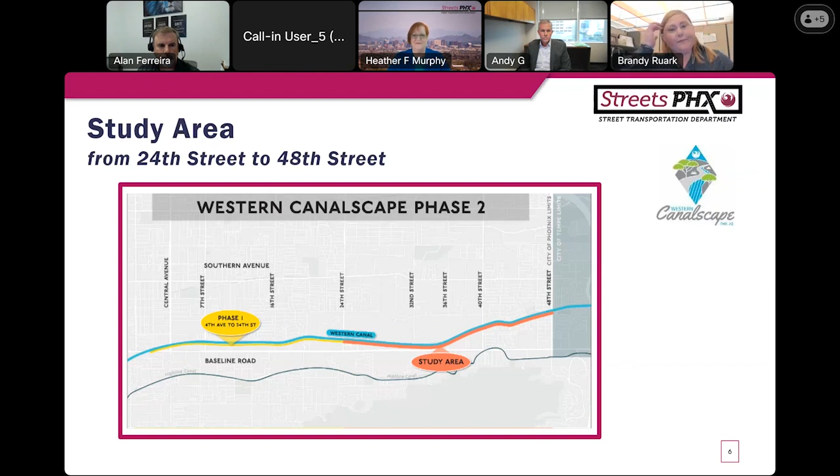The Western Canalscape Phase 2 study will provide an additional recreation route that builds toward the 2050 Climate Action Plan goal.

Also, the Phase 2 study will provide a safe route for people walking and biking and safe street crossings like shown in the example photo for Grand Canal Phase 1.

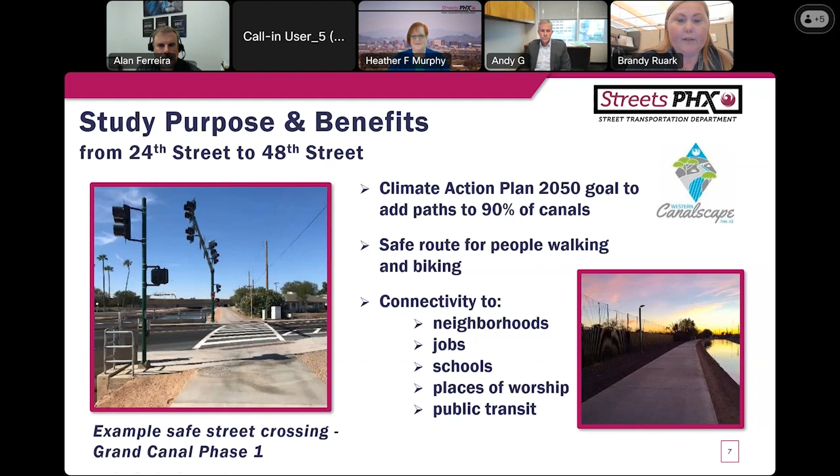Another great benefit of the study is it will provide connectivity to neighborhoods, jobs, schools, places of worship, and public transit.

This study for Phase 2 is in the conceptual phase in planning and pre-design to find out what's possible and what the community would support to make decisions for study options we are proposing tonight.

We are currently conducting pre-design, and the next step is to look for funding for design and construction.

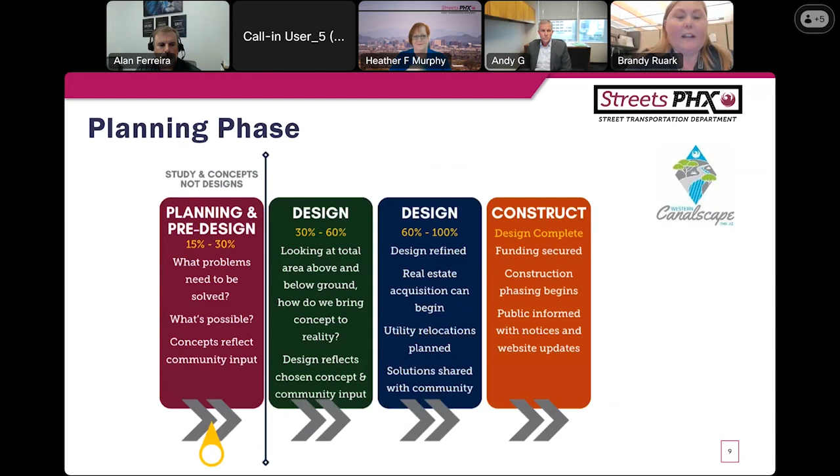This study is for Phase 2 of the Western Canalscape series. Western Canalscape Phase 1 is at the end of final design and goes into construction later this year, and is between 4th Avenue and 24th Street, while Phase 2 extends improvements to 48th Street.

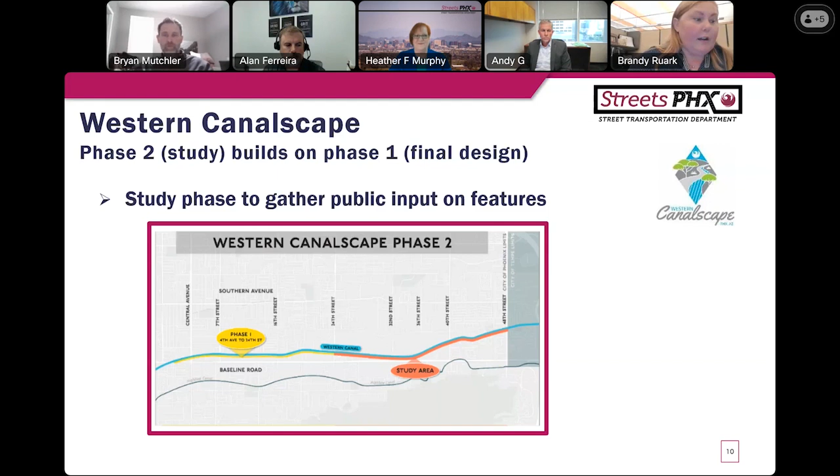Tonight, we are seeking your input on study options for Canalscape features.

The study is a joint partnership between Salt River Project and City of Phoenix. We are following guidance from SRP in building canal paths.

SRP uses a 20-foot minimum usable bank width as shown alongside the canal to maintain it. The area for recreation is the canal path shown that's within this 20-foot usable bank width, while lighting, landscaping, and amenities are located outside of the 20 feet so SRP can maintain access.

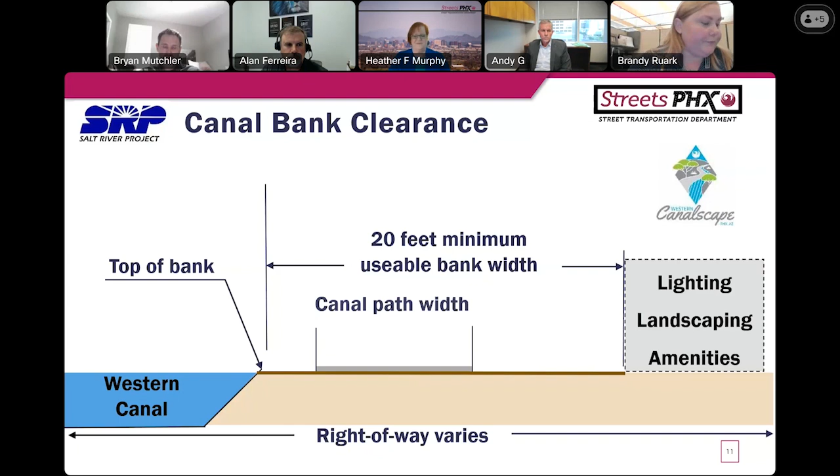The purpose of our engagement tonight is to introduce options to the community and present the options that will take the study to the next stage.

We met with the community in May 2024 to get the word out about the study and receive feedback from the community on what they would like to see in the study area.

At the same time, we conducted the first online community survey to get feedback from the community on their outlook for updates to the area. The responses from the survey helped to propose and present options tonight.

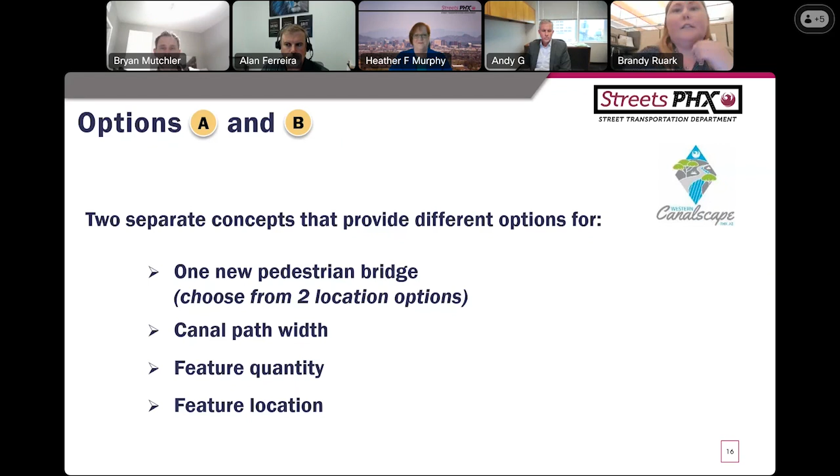A pedestrian bridge will provide connectivity throughout the study area for canal users. The study only recommends one pedestrian bridge at this time.

The community survey that is going live tonight will allow you to choose one bridge location from two options. Pedestrian bridge location option 1 is between 36th Street and 40th Street, while pedestrian bridge location option 2 is between 40th Street and the existing pedestrian bridge.

This existing pedestrian bridge is a few streets to the east of location 2, and we will be improving the decking on this existing bridge as part of this study.

Alternative options A and B provide the opportunity to choose your preferred canal path width, of up to 10 feet or up to 12 feet. Western Canalscape Phase 1 has up to a 10-foot wide canal path, but we can change the look of Phase 2 with up to a 12-foot path. This is an updated standard based on the active transportation plan and will provide more comfort and room to share space with all canal users. Keep in mind, the number of amenities will be impacted with up to a 12-foot wide path.

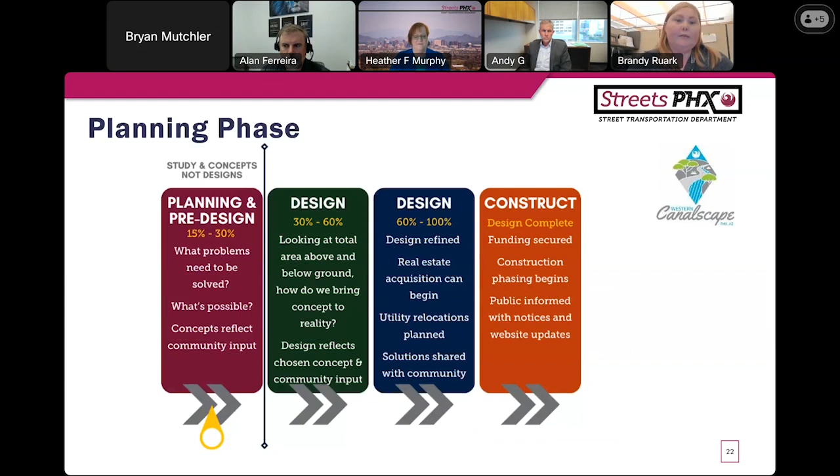Please visit our study website to take the online survey by May 18th. Also, we have a project hotline to gather comments and answer your questions about the study.

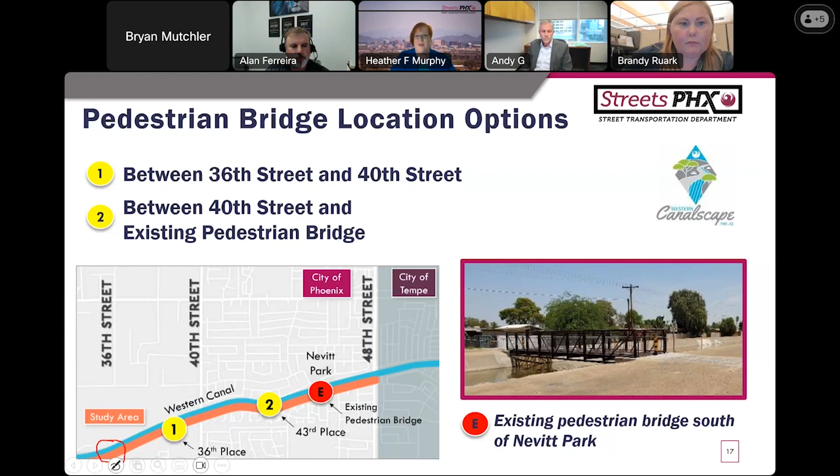Thank you. And another submitted question: what are the current city regulations for the use of bike paths by electric bike riders? Currently they're present on Tempe Western Canal sections and can be a nuisance or danger to walkers or runners. Would anybody like to take that on?

I believe, and I'm not positive, but I'm pretty sure that electric bikes aren't allowed along the canal system. However, when we open up the Grand Canal, you do see a lot of electric bikes there, and enforcement is tough. But it's not allowed by code to ride along the canal, and that's an SRP requirement too.

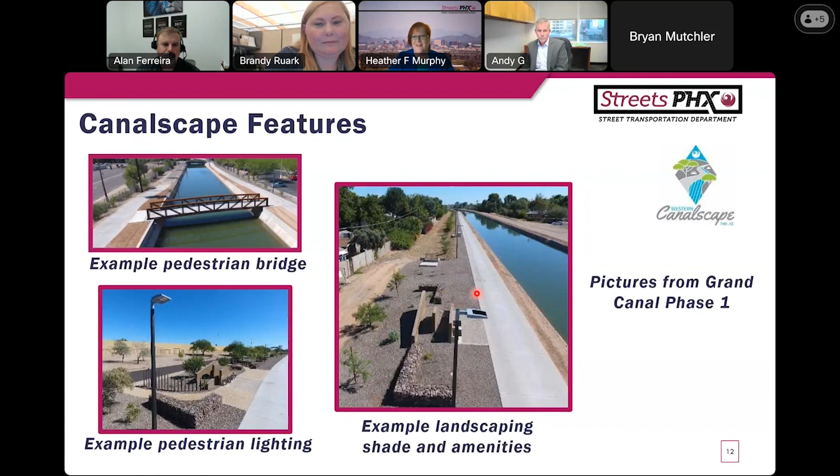There was mention of motorized vehicles not being allowed, but the individual is asking whether motorized mobility aids like power chairs and scooters are included in that restriction or not. And the intent for this project is to be fully ADA accessible.

I think maybe that's a question we can follow up with, as follow up to this public meeting, as far as what is and isn't allowed along the path.

And some questions about whether cooling pavement or concrete can be used to offset the heat that concrete outputs. Will shade structures be built? And will there be seating underneath the shade locations?

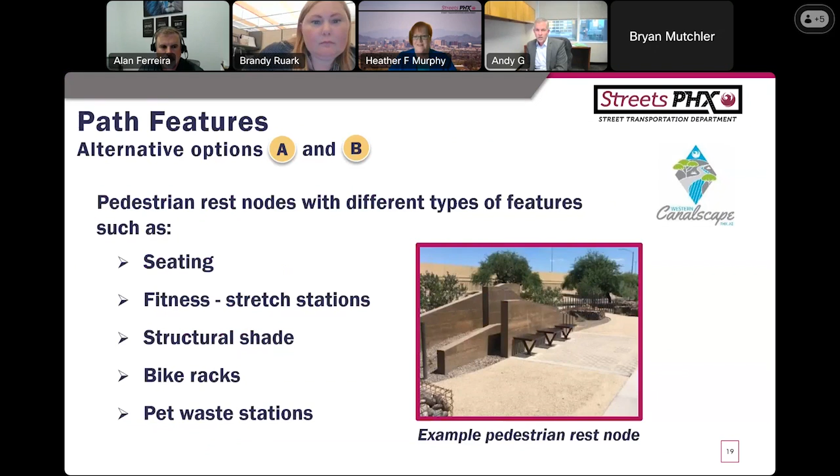I think that's one of the amenities that we're evaluating, and we're looking for the community to provide feedback on that. So if that's of high interest, then that's something that we'll look to include in the scope of the final design.

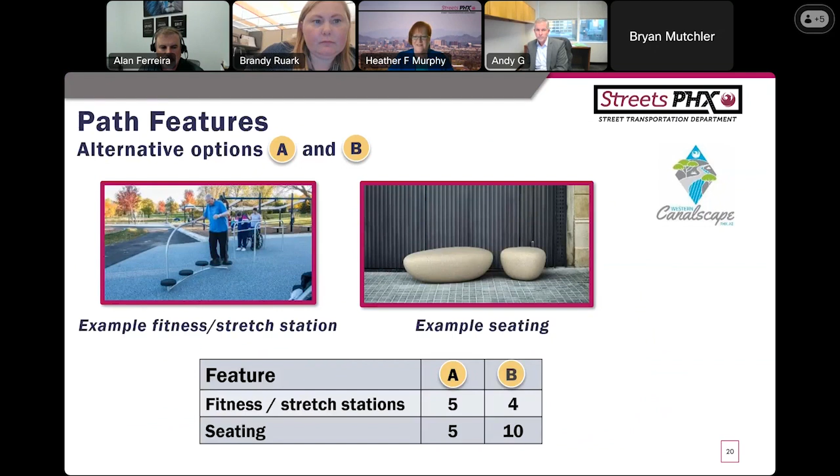And as far as the concrete path, we have not used any type of cooling surface treatment along any of the other sections, but that is something that we can evaluate.

As some may know, we've got a Cool Pave pilot project across the city for local streets that helps to cool down the asphalt pavement along those sections. It's in a test case study right now, but that potentially could be something we could look at here, but that's something we'd have to further evaluate.

I think we're coming up on the end, and we're coming up on the top of the hour here. But one of the most recent questions is, given that this is part of the city's environmental initiative, are there any concerns for temperatures by adding so much concrete? And are there plans to offset this with trees, vegetation, or shade structures?

The study is definitely implementing shade wherever possible. And I presume it would be to eliminate any concerns, but I don't know the full answer to that question.